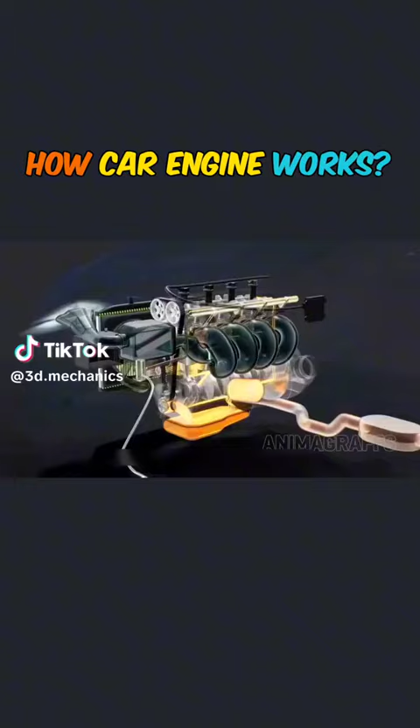The person who invented the car engine was really a genius. It can be considered the heart of the car. We start with a piston to understand the working principle of the engine.

Taking a 4-cylinder engine as an example, the piston drops and the fuel enters the cylinder through the intake port as an air-fuel mixture. At this time, the two intake valves open simultaneously. Then, all the inlets and outlets are closed, and the piston moves upward.

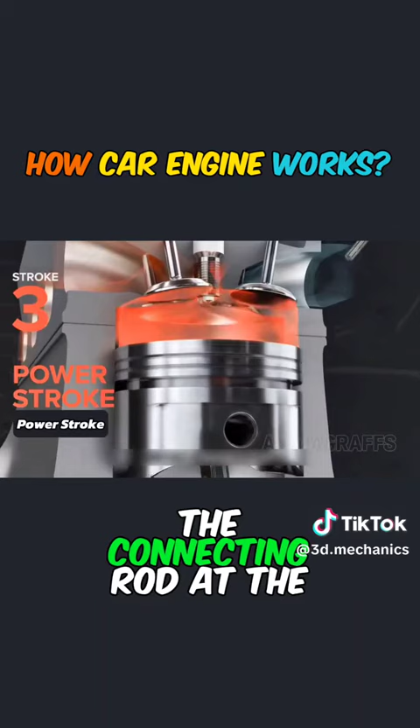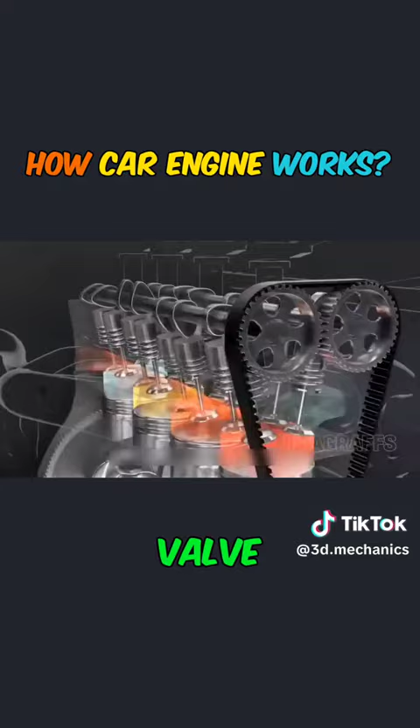In order to transmit power smoothly, ignition is performed alternately in the order of 1, 3, 4, and 2. The rotating cam above the cylinder controls the opening and closing of the valve. The crankshaft drives the cam through the belt to transmit power.

The other end of the crankshaft drives the gear. The rotating gear is connected to the transmission. This forms a simple power delivery system. Of course, this is just the core part. There are some auxiliary devices as well.

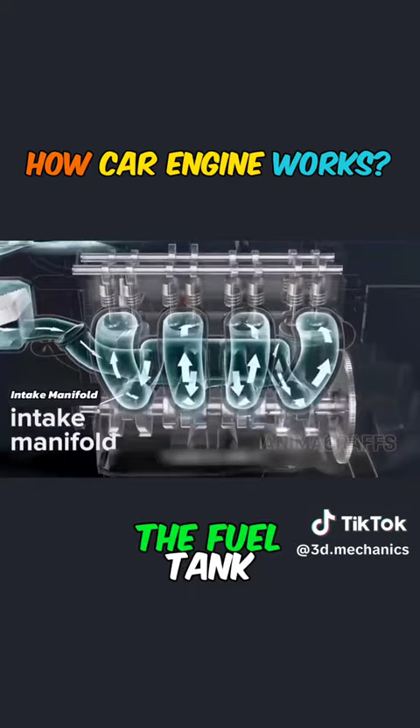The air enters the intake pipe through the air filter, and the gasoline is stored in the fuel tank. It passes through the fuel filter and the injectors into the intake manifold, where the fuel and air mix. The mixture is sucked into each cylinder through the air inlet.

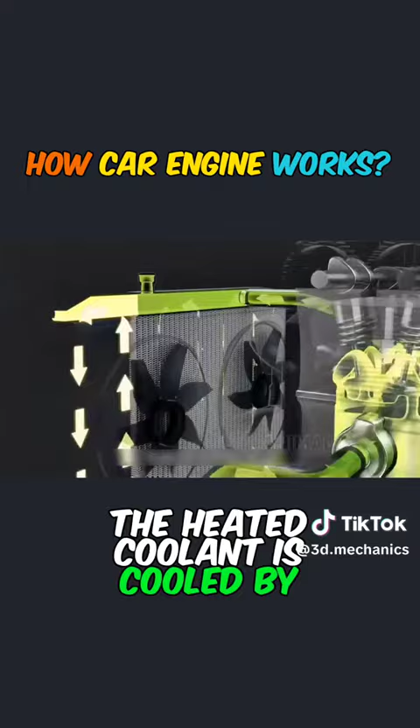The temperature of the engine rotating at high speed is very high. The coolant is circulated around the engine through the pipeline to cool it down. The heated coolant is cooled by the fan. The oil is stored at the bottom and is circulated in the engine through the oil pump.

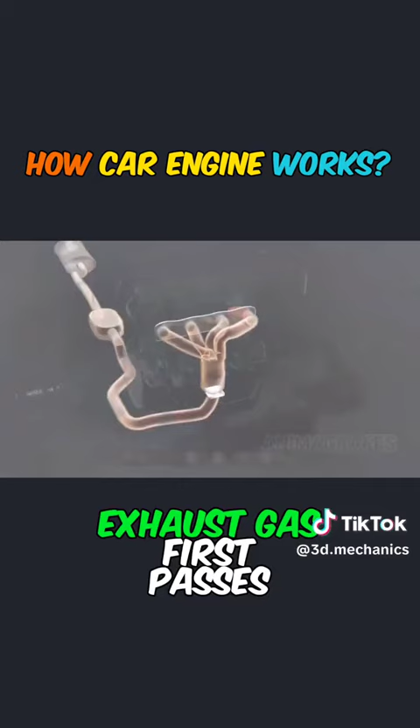The exhaust gas produced by the combustion of the continuously lubricated engine is discharged through the exhaust pipe. The exhaust gas first passes through the catalytic converter to capture toxic gases and then is discharged through the muffler.